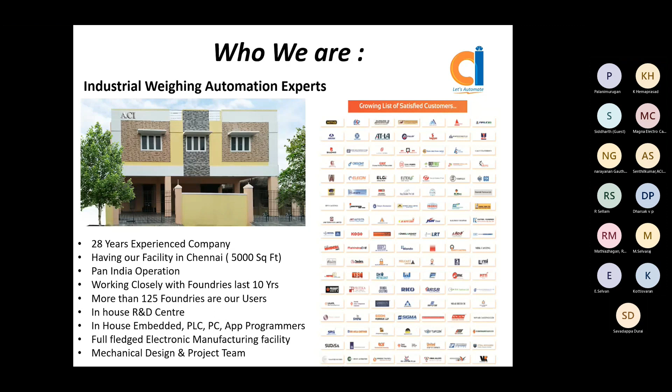Our presentation is going to be on this: how to choose the right weighing systems, and what is meant by validation of the weighing systems. And we will see how digitalization of the process control would help in this process. If time permits, we will also touch upon the automation.

I'm leaving it as an optional one. I'm making myself a target time of about one hour. I don't want to bore people more than an hour. If time permits, we will touch upon the automation solutions, or if time exceeds, we will take this up as a separate session at a later time.

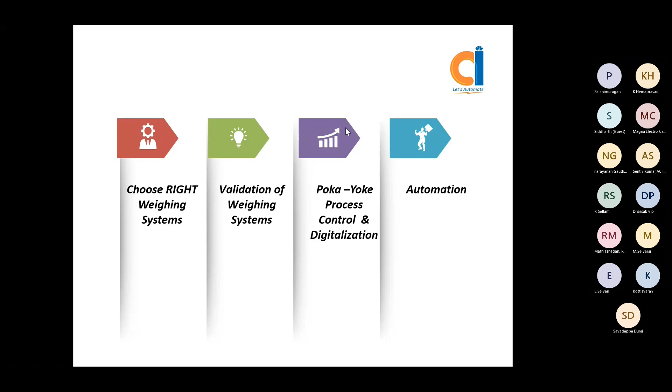There's a batch hopper and additive hopper, based on load cells, so that the required proportion of return sand and fresh sand can be weighed, and additives like coal dust and bentonite can be weighed and mixed in the mixer. And of course, the final finished castings are weighed through weighing scales. Recently, inoculant feeding systems also come under weighing. We'll also talk about this.

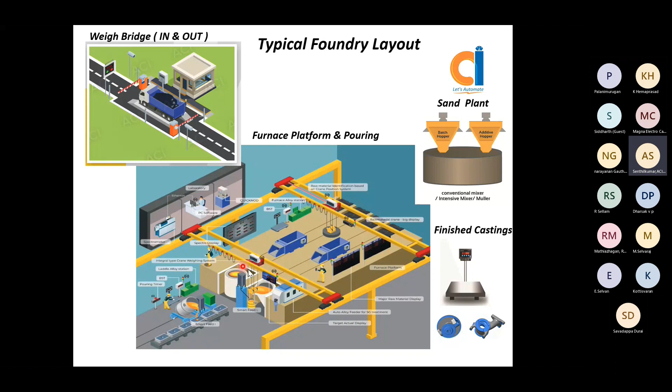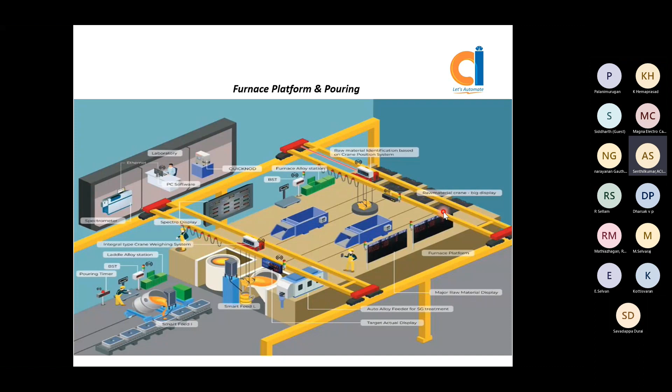I would be touching more on the furnace platform side. Weighbridges are the generic one. Sometimes people have their own weighbridges, or sometimes people use an external public weighbridge to weigh the raw materials, and I don't believe it will attract a major audience here. That's why I'm skipping the weighbridges, and we will talk more about the weighing systems utilized in the

In close to 300 to 400 foundries, I have seen people struggling with these solutions. Either you have a very expensive imported weighing scale, or people go with a local make weighing scale, which gives a life of only about 6 months or 1 year. That is the status we have seen in the country. What we are trying to do is an integral type weighing system, because this particular weighing system has a problem: since it is very close to the molten metal, the life of the weighing scale is

always minimal. The second major issue is that when the SG treatments are happening, a lot of smoke comes out. People are not able to see the display at all. They just use judgment and stop the tapping. And the third point is charging. You have to keep your battery always charged. If it is forgotten, you will not be able to use the weighing system. So this is the third major hurdle people are facing.

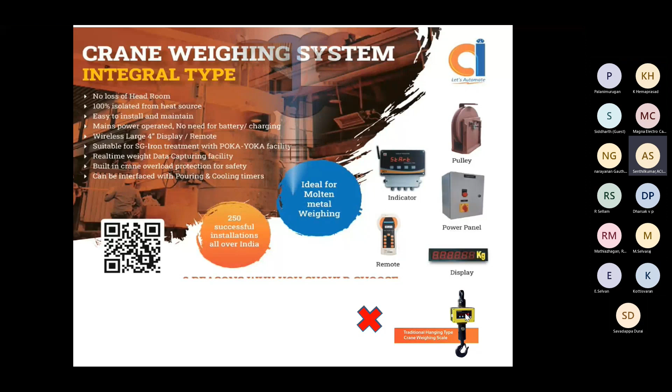And of course, as I told you, barring the imported one, local weighing systems have a very short lifetime. The change we made is that we introduced the weighing system in the equalizer pulley, where in the four-fall mechanism 50% of the load is shared by this pulley; instead of the shaft we put a load cell. We introduced our electronics, which travel along with the CT, and the load cell is directly connected to these electronics, which have a Wi-Fi RF output, and this is connected with our large figure display, which people can see from the ground level.

The direct benefit of the system is this: since it is away from the temperature, the life of the weighing system is ensured, and it works on the crane power. There is no battery charging required, and it eliminates all the problems which I explained just before.

Okay, what is the uniqueness? There are a few people who also do this solution, but the advantage of the system is that it has got remote calibration. That means whenever you want to calibrate the system, basically you have to go to the top and fiddle with these keys. There are four keys you have to fiddle with. That is the case for a few of the manufacturers.

In our case, we provide a wireless remote where you can calibrate the system standing at ground level. You don't need to go to the top every time, even if it is once in 3 months or 6 months. It will be appreciated by the maintenance team. Basically, how we are attaining this is by synchronizing both the main electronics and the displays.

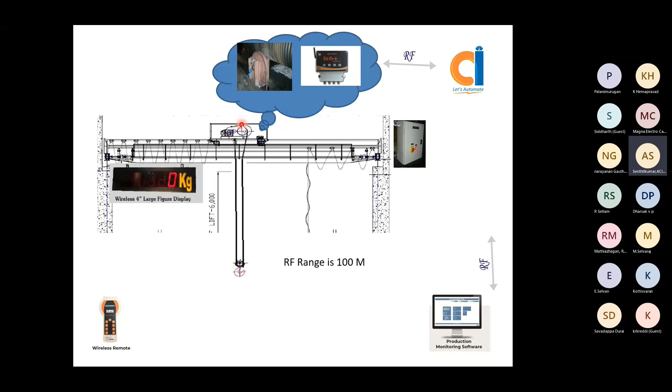The third one is the rope weight compensation. Rope weight compensation means you would have to keep the object at the same location. Suppose it's a crane: you have the object here, you get a different weight. Suppose the object is kept in the middle, you get a different weight because of the rope length. Please remember that we are measuring at this level, not at this level. We are measuring at the top. This also poses a bigger challenge to us.

To overcome this, we have introduced the encoder so that we understand the rope length, and accordingly the weight is compensated. Irrespective of location, whether it is at the bottom, the middle or the top, you get the same weight reading, so you will not get any variations. This is also one of the major changes we brought into our weighing systems.

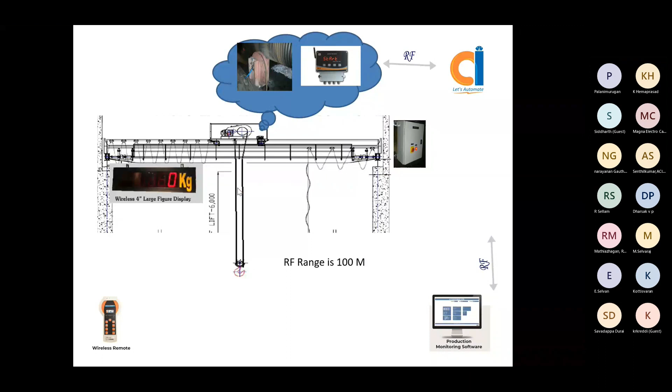Apart from that, we don't consider this just a weighing system. It is also used as a data recording system. You will be able to measure how much molten metal you have produced in the shift or in the day. At the press of a button on the remote, the data gets stored on a computer within a vicinity of 100 meters. Again through RF signal, we put an RF receiver at the computer end, along with our receiving software, which records the data with the date and time, so you'll know how much molten metal is produced.

We also provide additional displays. This is a standard display, and this is our multifunction display, which is basically used to give a poka-yoke function. For example, if you want to tap around 1000 kg with a tolerance of plus or minus 10 kg, you can fix the target weight in this display.

Apart from the weight indication, there is also a tower lamp. If it is out of tolerance, the red will glow and give an alarm. If it is less than the tolerance, the yellow will glow. Within the tolerance range, the green will glow. This gives an additional okay indication to the operator, which makes their life much easier, and it is also much appreciated by a lot of buyers.

Even this system is used for molten metal, and we provide this remote. But if you use the same weighing system for your raw material application, just registering the weight may not serve the purpose, because you should know what material is being weighed, whether you are weighing pig iron or CRC or borings. If you can identify the material along with it, that gives more value to you.

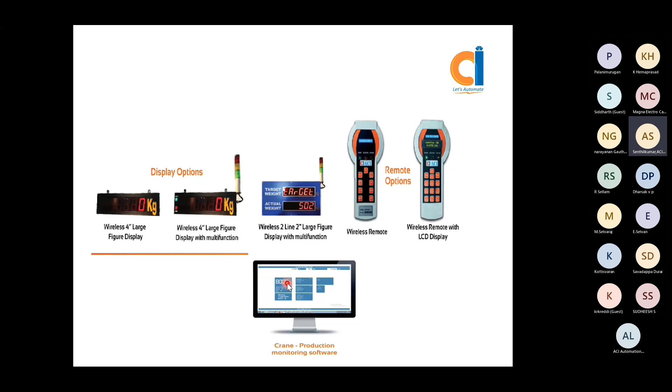Just to give an idea, as I mentioned in the beginning, we started with about 10 systems about 7-8 years back. After studying the market and adding value to this product, we have reached close to about 350 numbers as of now, and it's a well appreciated product. We have been competing with major multinationals on this product, and we get a lot of repeat orders for this solution. In many places people still go with the lower-end hanging scale, and they get a lot of issues. This would be the alternate solution to get the molten metal or raw material data.

Okay, I'll just skip this.

Okay, one more factor I would like to talk about is accuracy. People sometimes ask what kind of accuracy your system has. So what is accuracy? Accuracy basically depends on the application you are using it for. You have seen the picture here, right? On the right-hand side, there is a jewelry balance, where we talk about accuracy in the range of milligrams.

Because there you are paying a lot of money, items are very expensive, so people measure at the milligram level. When you go to the grocery shop, it is normally in the range of grams, say 10 grams, 50 grams, 100 grams. When we weigh a person, we don't need that much accuracy; it's normally at the 500 grams to 1 kg level. The accuracy required is defined by the application, and you have to decide. For our crane weighing applications, it is very well accepted in the market that plus or minus 5 kg for 5 tons, or plus or minus 10 kg for 10 tons, and we are able to provide that throughout the range. I'm sharing this information just to give the data.

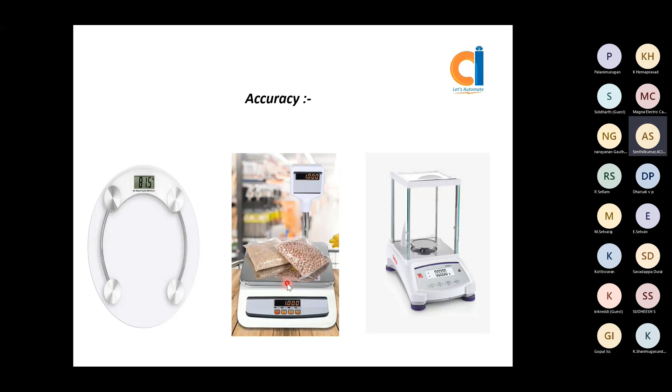Next, coming to other weighing systems like platform scales, which are widely used in industries to weigh alloying elements as well as in your stores. What is the selection criteria? You have any number of players for these applications; it has almost become a commodity. My recommendation would be to see what kind of load cell they are using. Don't go with lower-end ones like Chinese load cells, where reliability is always a question mark. And see the background of the people and their electronics, because nowadays people get electronics from somebody, assemble it and supply it. When it comes to support, they are not able to do it.

Find a reliable partner who has been in this business for quite long, and ensure that it has got a communication port, because normally we want to go for the next level of data integration, and you need to have that communication port for the weighing system. The majority of the major multinational players provide this, but a few local manufacturers do not provide it unless you ask for it. The main thing is their after-sales support; you have to see that.

The third one is the vibratory transfer car weighing systems. Many people nowadays are trying to introduce the weighing system in the charging car itself. It is one of the biggest challenges; it has to be designed in such a way that the load is 100% acting on the load cells. You need to go for a very special load cell, because a normal load cell will not serve here, because there is a lot of vibration.

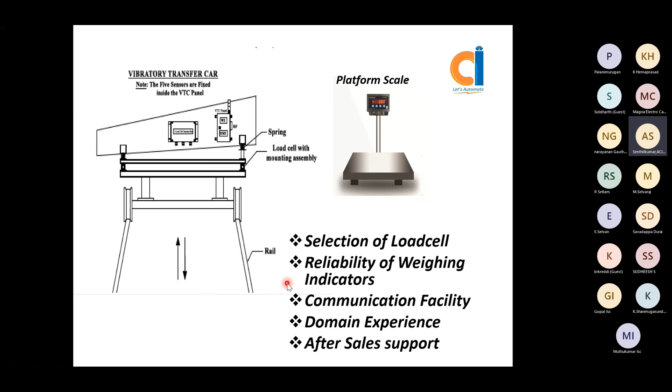Okay, next we come to validation. I'm not sure how many people are aware of this validation. Can I have any feedback on this validation part?

Basically, people have a misconception about calibration and validation. Calibration is correcting the system using a reference weight. Validation is verifying whether the instrument is delivering the required accuracy or not. Suppose you are saying 100 kg plus or minus 10 grams: whether the weighing system is linear from the zero range to 100%. That is called validation.

Generally, we recommend validating the weighing scales once a month or once in 3 months, and calibration needs to be done once in 6 months or once a year. This plays a vital role, because normally this is one of the neglected factors in industries. Generally, we use a weighing scale, weigh the alloys and do the addition in the furnaces. Then we check everything, we see that there are variations, and then for cross verification we go back to check whether the weighing scale is okay or not.

It is more visible in the weighbridge business. People have weighbridges, they do a weighment and supply material. When the customers come and complain that the weighment is wrong, their weighing systems are showing different from your slip, then we do all the back verification of what went wrong. Then the weighbridge is verified with test weights for whether it is showing the right weight, and only then are the correction factors taken in. But by that time the damage is already done.

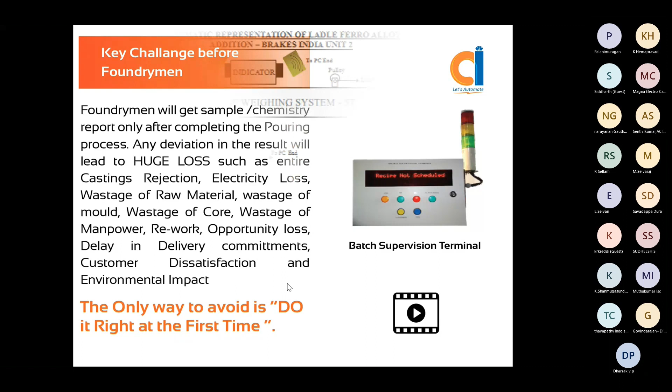Now we'll come to the solution: how it can be avoided in typical Indian MSME foundries without investing much. The idea is to do it right the first time, every time. I will also run a video to give a clear picture. How do we do this? We provide a terminal called BST, Batch Supervision Terminal, which you can think of as an electronic supervisor connected with the weighing scale. Any weighing scale, as I told you, should have a communication port.

This BST is connected with the computer through Ethernet or RF wireless signal, and we run software on the computer where you can define your product details, like the ferrosilicon quantity required, the covering material quantity required, and the molten metal quantity required. These can be defined in the computer as a product. When manufacturing starts, the supervisor starts in the computer: I want to run this particular product for so many batches. The job at the computer is over. I will show the screen at a later stage.

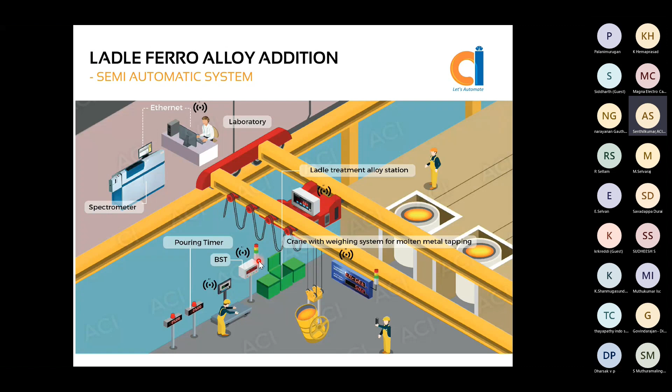When this is started at the computer, the BST will show what material and what quantity to be weighed on this display. The first line shows which alloy is to be weighed and how much. When they do a weighment, it also gives an alarm. Suppose you want to weigh 10 kg of ferrosilicon: if it is less than the target weight it shows a yellow light, and if it is more than the tolerance weight it shows a red light. To give a better picture, I will run this video.

Okay, but I think the link is not there. I'll just go to my YouTube channel.

Are you able to see my video? Yes, sir, we can see it. Are you able to see, right? Yeah.

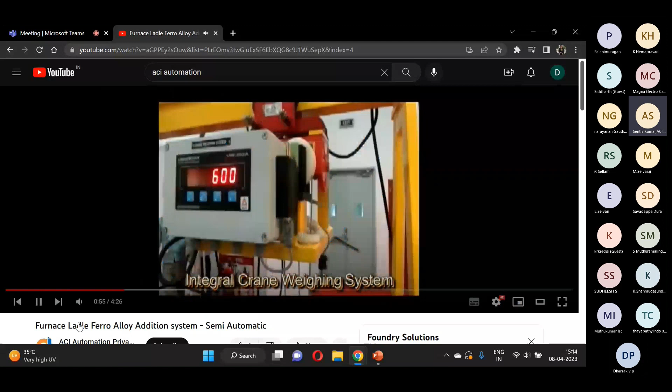So this is a typical screen which has got a 3-layer of password protection. And you create a master. What is the ferrosilicon and covering material?

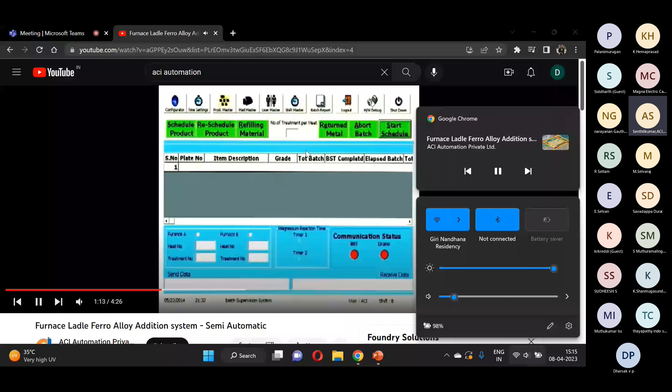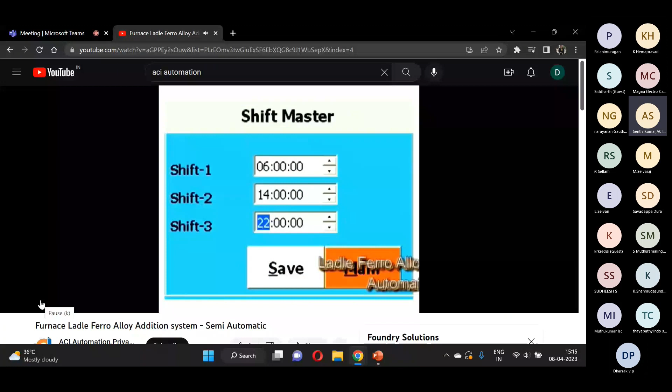And it's got a user master. You can also define the shift. And this is your scheduler. When you want to do a production, you have to say what material you are going to produce, what process you are going to do.

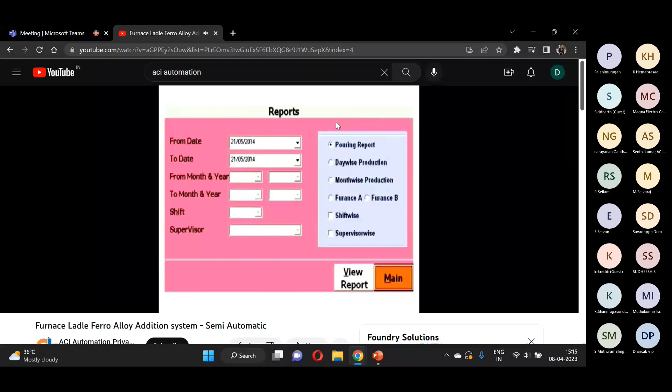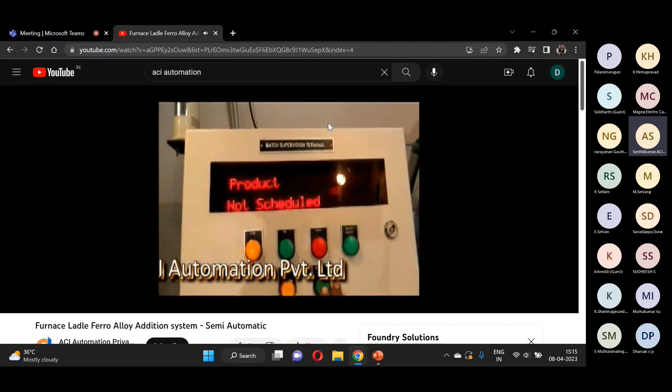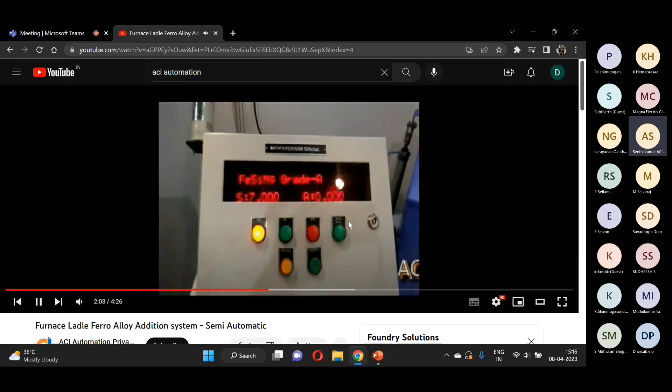So once the scheduling is done, this is a terminal. It's a very rugged terminal kept near the weighing scale, and it gives baby steps to the operator. It first says to keep the container, and they have to keep the container and press a button. It gives what material is to be weighed, what is the set weight, what is the actual weight. They don't have to see the weighing scale, they can see this terminal itself.

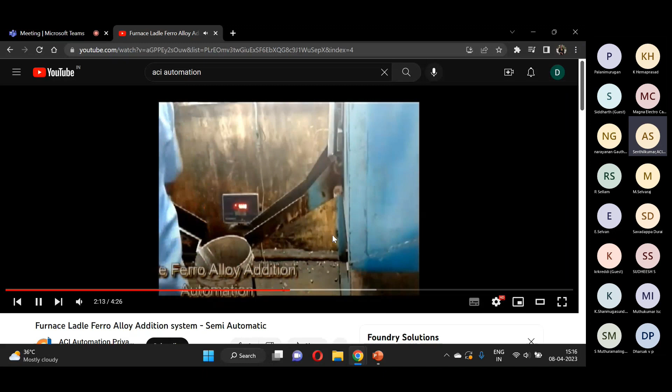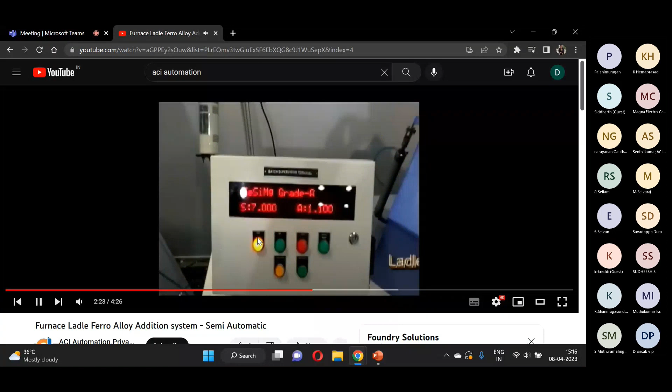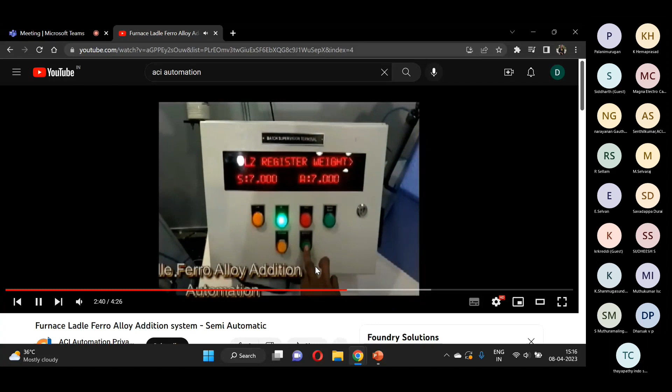See, now it is less than the weight. They are trying to press a button. Additionally he has to do this, press a button. It will not accept if it is less than the range, and even if it goes out of range also, it will not accept. Then he has to take out the material and bring it to the required range, then press a button. This ensures that he is weighing the right quantity, as specified by the team leader.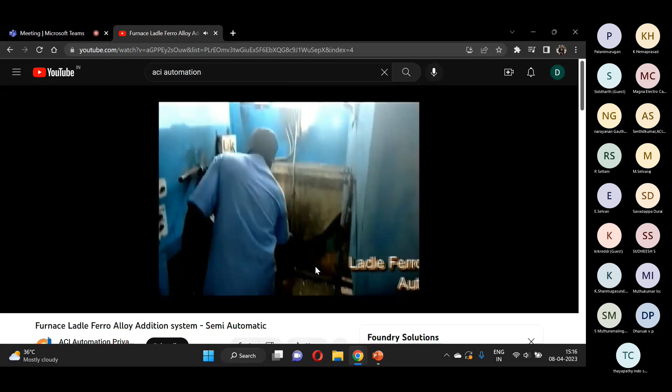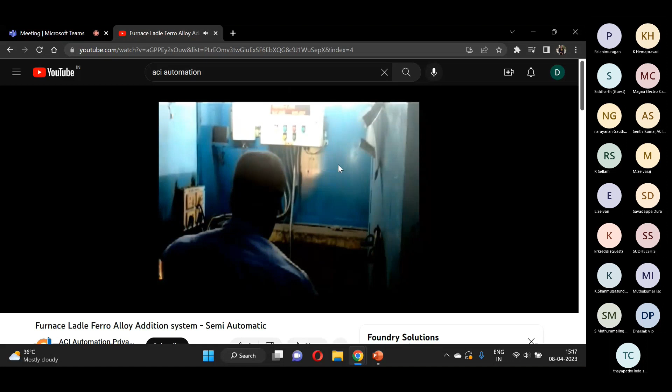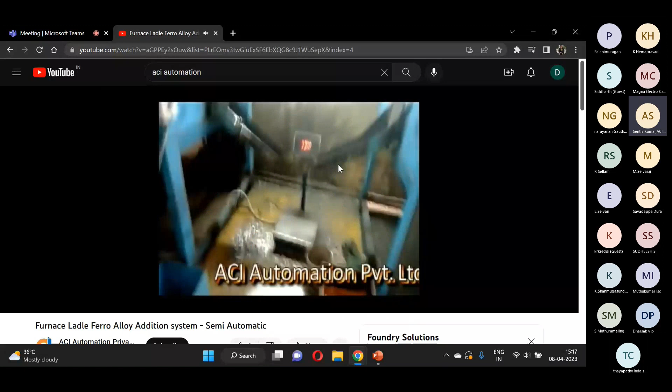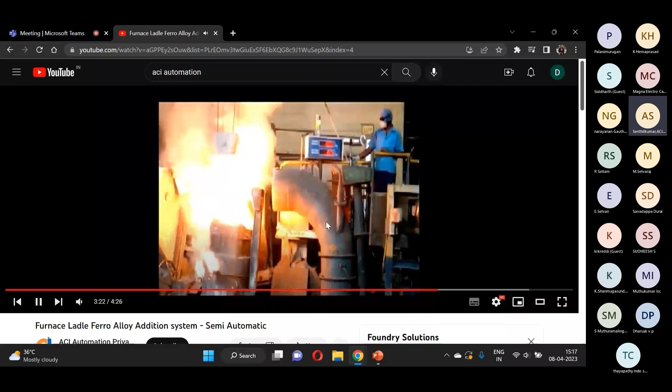The next option again is to start the container. It shows the steel covering material. So now both the materials are weighed. It says batch over. Now we bring the ladle to this place and put the alloys inside. So the batch is discharged. Then the furnace operator will come to know how much molten metal is to be tapped. Now weight will come from the weighing system.

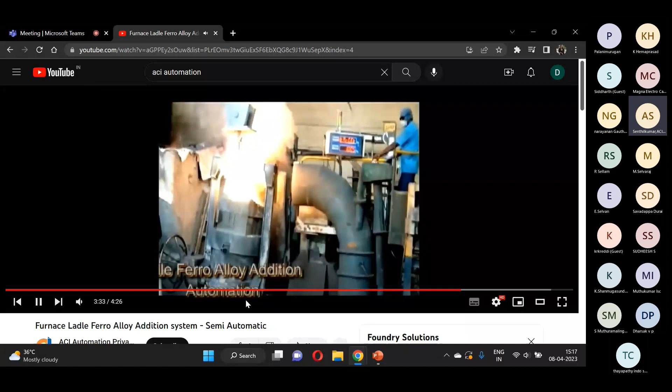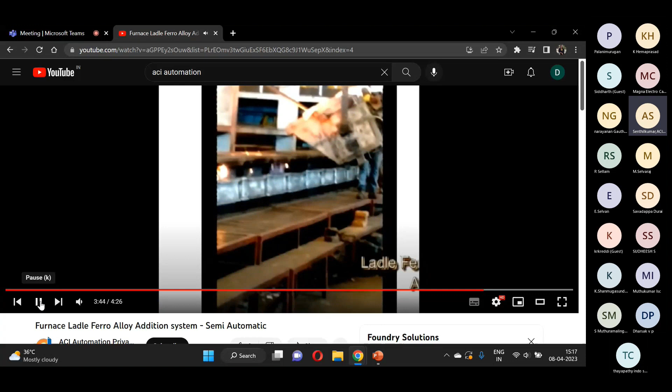See, optionally, what happens? You can also have the storage container, because the weighing scale will not understand whether I'm weighing a ferrosilicon grade 1 or grade 2. If you want material control, you can have a bin like this. Suppose you are using two different ferrosilicons, maybe one from SNAM, one from Elkem. Maybe certain products use SNAM alloys, some certain products use Elkem alloys. Both look the same, and a new operator may not know which alloy to be added.

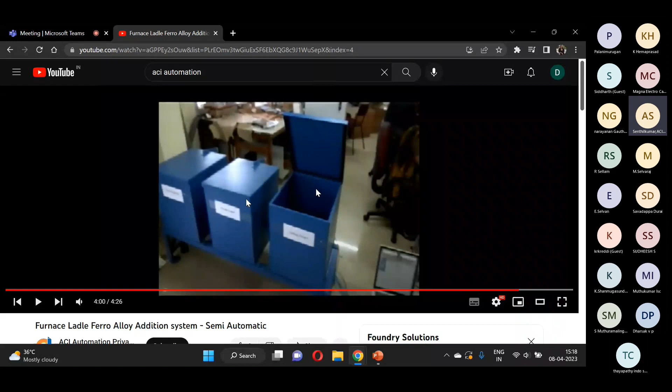In that case, you can have a bin like this. When the system specifies the particular alloy, only that bin will open. When the registration is done, it automatically gets closed. It also has a voice module, so that people who are not able to read English will get instructions in a local language, as baby steps. It will give instructions like 'weigh karo, weight tik nahi' and so on, also in Hindi, so that people will not make any mistakes.

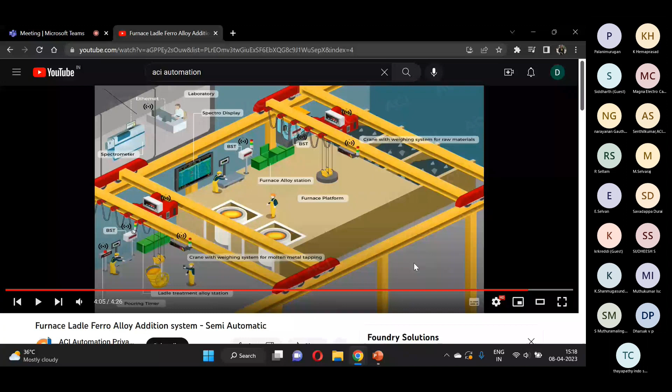Is it clear? Can we proceed? Proceed, sir. Yes, sir, we can proceed.

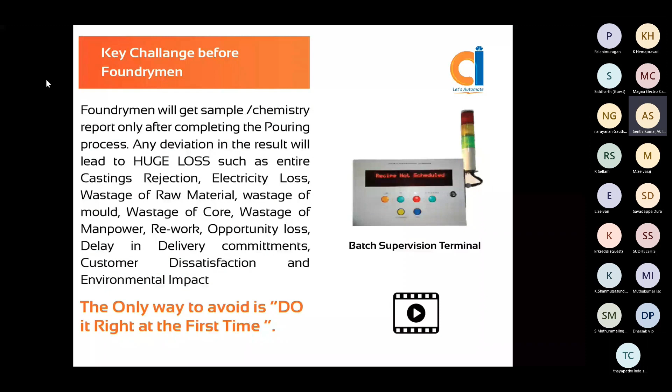Yeah, this is a system, as I told you, a poka-yoke system where it ensures that each and every treatment is done without any mistakes, and operator dependency is totally eliminated. The idea is not to remove the manpower; it will de-skill the manpower. Your poka-yoke systems will help you de-skill the people so that anybody can be put on the job.

This system is running in many places. One of the clients, Brakes India, has had it running for the last 7-8 years. This system was running at this plant for about 4 years back, until suddenly we got a complaint saying that one treatment had failed and they did not know what was happening. Then we went and studied along with the customer to identify the root cause.

See what happens. Like you have seen in the video, right? Generally, they have to press a discharge button when the alloys are put inside the ladle. That is the procedure they are supposed to follow. What happened was, one operator in the night shift made a practice of pressing the button, then putting the alloys in the ladle.

It becomes a reversal. In one case, he forgot to put the alloys, and then the empty ladle went for tapping, molten metal got tapped, and it went for pouring. The entire batch got rejected.

Now, to identify what went wrong, we had a brainstorming session. What we did was introduce a separate platform scale with a capacity of about 5 tons.

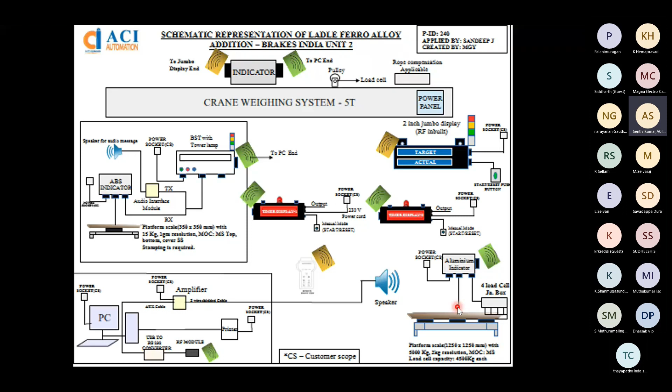Now we talked about the ladle addition, and we'll come to the furnace base metal. The same way you do ladle addition, it's similar for the base metal for cast iron. You do alloy weighments, and also weighments for metallics like pig iron, CRC, borings - all those weighments are done.

Generally nowadays, what happens is people give a recipe paper or a display board where the operator has to see that, and accordingly it has to be weighed and put onto the charger. Then it gets dispensed to the furnaces. This is the general practice.

Whenever they do a weighment, they put it on the logbook, and then the logbook data is converted into maybe ERP or an Excel sheet. Here we merged both digitalization and the poka-yoke systems together.

Now look at the system. There are about 3 layers of mistakes. What happens when they do the weighment of alloys - there could be a weighing mistake. Whether he does it as per the requirement or not, nobody knows.

The second issue is that when they read out this data and write it down on the logbook, there could be a mistake. And the third mistake is when the log data is again converted into the ERP Excel sheet - a data entry mistake. There are 3 layers of mistakes happening, and with this data only, all our decision-making patterns are happening.

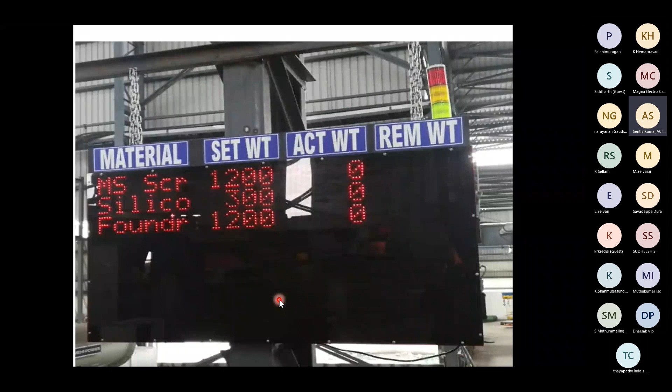For the alloys, you already have the setup. The same terminal is introduced for the alloy weighing scale, and we provide bins like this for material mismatch control, so bin control is also possible. For the big metallics, we provide a scoreboard like this for each and every furnace - if you have three crucibles, three displays, or four crucibles, four displays.

This is what our software looks like. I told you last time that our software for both the treatment and base metals is common. This is our main screen. The upper portion is done by the administrator, which is a one-time exercise, and this part is done by the supervisor for rescheduling and everything.

The operator can just see what is happening. This is the main screen, and these show the communication happening with the instrument. It gives an indication of whether the communication is live or not. All this information comes in the dashboard.

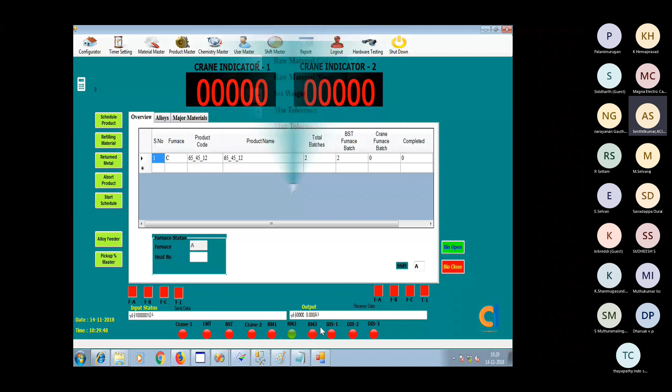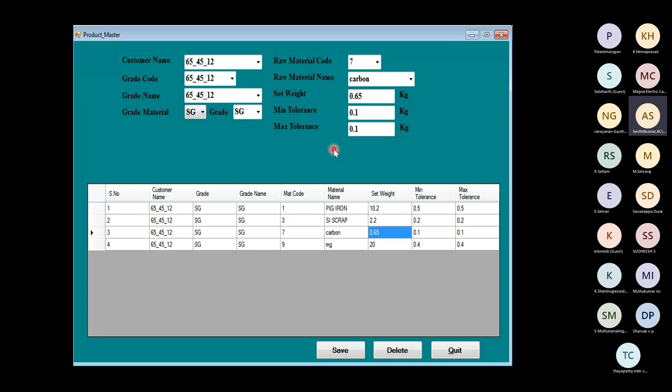Similarly, we also maintain the chemistry masters, like carbon minimum and maximum, silicon minimum and maximum. All these parameters can be entered one time, or we can take the data from the ERP automatically.

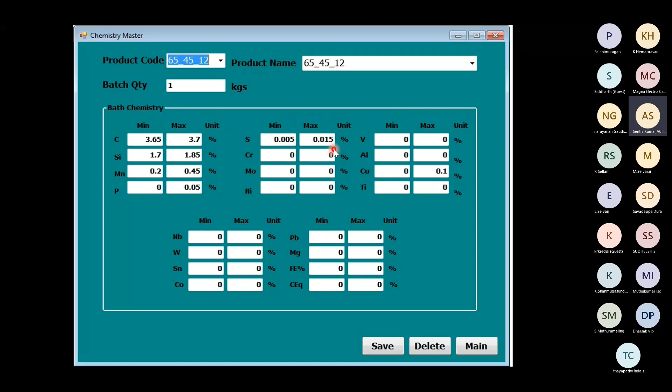And the user masters, where we have administrator, supervisor, and operator levels. Generally administrators we provide only one person, and you can have multiple supervisors and operators.

And shift master, where you can define the shift. And then, as I told you, the validation of weighing systems. If you recollect, we discussed the validation for every weighing instrument, you can give the validation time period, so that it gives a prior intimation to the operators.

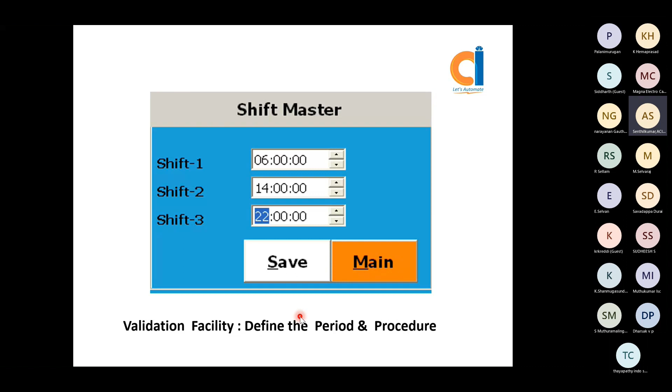Once it is done, the operation starts at the main display level. I'll just run a video so that you get a clear idea how it is happening.

Sorry. Are you able to see my video? Yes sir, yes sir, yeah. Yes sir.

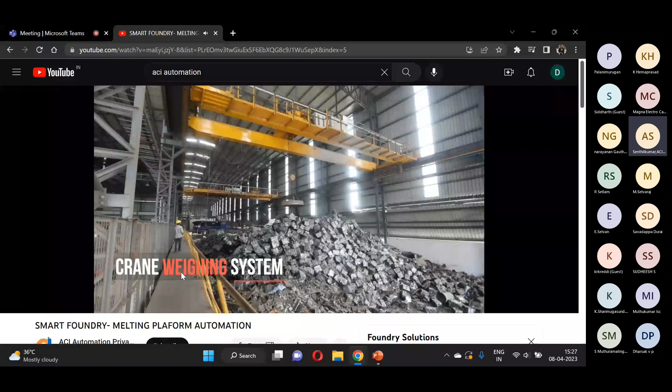The weighing system is introduced at the raw material crane.

Sir, the video is like a slideshow. Just checking, is the video like a slideshow, or is it like a number of pictures compiled? No, it's a video only, direct video only.

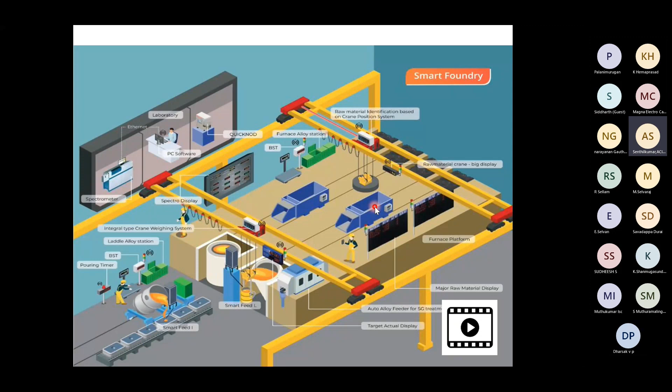How long would that take, sir? It all depends on the time we have. If it's like 5-10 minutes, I think we can extend it. Okay, what I'll do is I will not go in detail, just give a conceptual idea so people get the sense, whoever would like to think of it. Maybe the detailed one can be discussed later. Okay, so far, sure, what we discussed, sir.

What we discussed is with manual intervention, which is typically useful for the Indian foundry industries, and it is widely used. And this is a total automatic layout, which is implemented at one of the foundries at Jaipur, Universal Auto Foundry, our current IIF President's site, where the metallics are weighed automatically and dispensed automatically into the furnaces.

There you have seen somebody has to operate the crane, take the material, and put it on the charger, and then the charger gets dispensed. What we have done is, apart from your bay, the customer has constructed storage silos like this, elevated storage silos which have a vibrator. Apart from a regular charging car, there is one more charger which moves in this direction. This has got a load cell, we introduced a load cell.

This gentleman will act like a robot. All the software, everything, is common, the same software. When you select the particular grade, this charger will travel to the particular location, collect the material. Suppose it needs to collect the borings, it goes to the boring station, collects say 1000 kgs, and comes to the pig iron station, collects 500 kg, whatever materials are as per the plan. It goes automatically with the help of position sensors, and the motor is driven by our PLC control system, and then it comes to the particular furnace charger and dispenses the material.

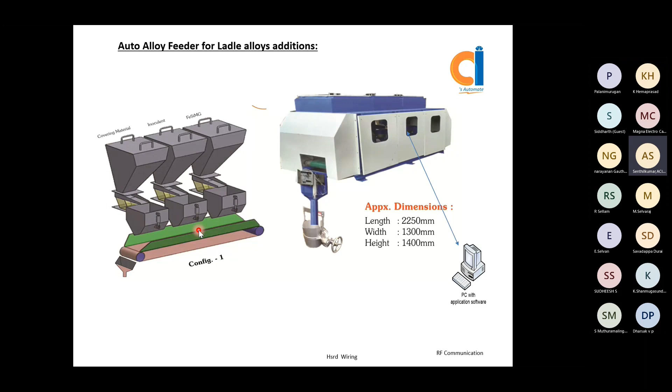Okay, coming to the SG treatment, whatever we discussed is where manual interventions are involved, whereas this system is totally a dispenser. You don't need any manual intervention. It has got a storage silo like this, a vibrator, and a weigh bin. Based on your recipe, this vibrator runs at 2 speeds. We call it coarse and fine. Suppose we talk about 10 kg, up to 9.5 kg it runs at a very high speed, and then for the last 500 grams it runs at very slow speed, and it gets weighed and kept here.

It depends on the number of materials: ferrosilicon magnesium, covering material. Suppose you have another grade of alloys or inoculants, they are put here, weighed and kept in the weighing bin. There's a conveyor and what is called a discharge chute. Normally, it is in an elevated position. The ladle has to be brought here, and when the ladle is brought here, press the discharge button, then the chute goes inside the particular pocket, because the alloys have to dispense into the particular pocket for better treatment. Then the conveyor starts running, one by one the materials get dispensed into the ladle automatically. Then the ladle is taken for the molten metal.

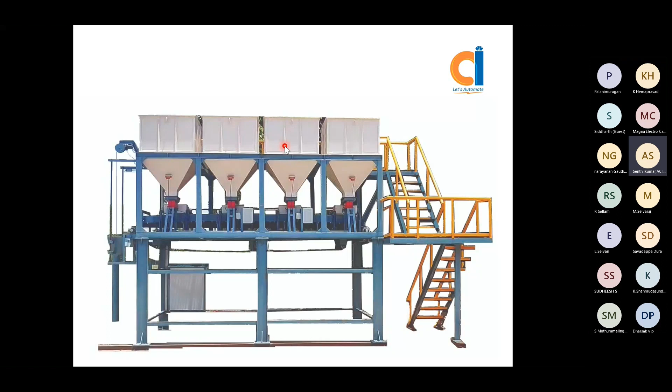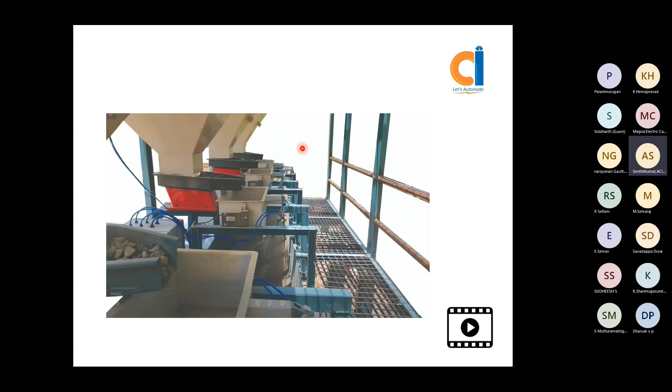This is totally automatic. You need a person only to fill these storage silos once in a shift or once in a day, depending on the capacity we choose. We have close to about 9 to 10 installations in the market. All are working in good condition. This is for SG treatment, because in SG treatment you cannot mix the material, so you have separate weighing bins. Whereas for the furnace alloys, since the alloys can be mixed, you can have a common weigh bin. Just short of time, I'm not running any videos. This is a typical alloy feeder where the ladle can come and the chute can go inside.

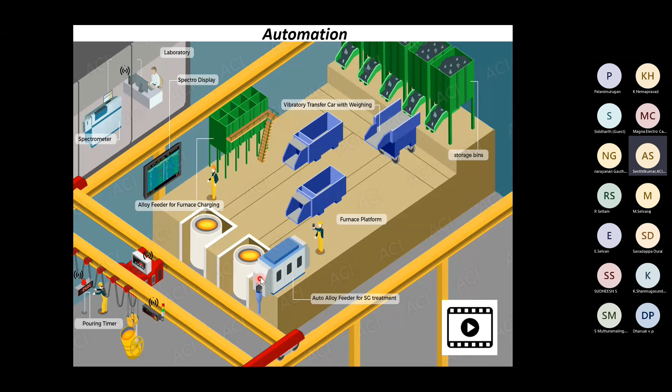This is the comparison between automation and semi-automatic. Automation typically needs a layout change, whereas semi-automatic can go with the existing layout. Sizing and uniformity are very important factors in automation, whereas sizing is not a criterion in semi-automatic or digitalization. For automation the investment is a little high, here the investment is low. With automation, reduction of manpower is 100% possible, whereas with semi-automatic you are not reducing manpower, you are de-skilling the person. Process control is 100%, here close to about 95%.

Automatic data capturing, and more suitable for new projects. This is more suitable for existing plants. Or sometimes people go for a combination of both. For the base metal, they go for semi-automatic. For alloying elements, they go for the auto alloy feeder. The combination is also possible.

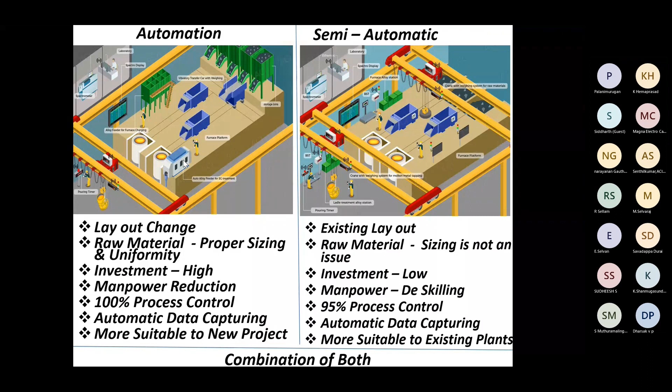Of course, this covers it. As I told you, we also have solutions for inoculation feeding systems for ladle additions, and then for stream inoculation. These are the solutions, again based on weight. We have solutions for casting counting as well, also for machining. If you are sending castings outside, we have a special machine called an online casting counting machine, which can also help customers. Thank you.